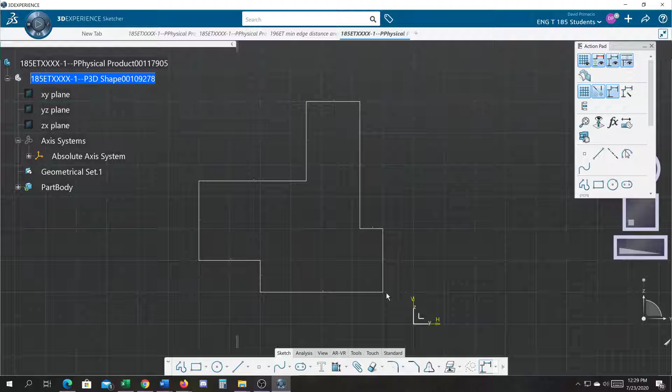Okay, I'm going to hit escape, undo this, get out of here.

Figure 2-4 is the block with the hole in it. You're going to do that on the XY plane. So this one is the XY plane. You're going to hit the sketch.

And for some reason, horizontal in France apparently is up and down, and vertical is side to side. But we're in America. Since we're in America, horizontal is going to go side to side, and vertical is going to go up and down.

In order to do that, you have to find that normal to view icon. I'm going to hit the normal to view once, and it puts the H horizontal and the V vertical, but for some reason it's in the negative direction for H. So I'm going to reverse that again by hitting normal to view.

Slide this down here out of the way. You're going to create your rectangle, and then you're going to create a circle right in the middle of that.

You're going to go create a solid in the negative Z direction, and your starting point again for this one is at 1 and 1. So this corner here is positioned from the absolute axis 1 inch in the horizontal, the X direction, 1 inch in the vertical direction. That is your start point for your rectangle.

Again, you have to measure the size and shape using your measuring instruments found in your syllabus. All right, you're going to create a solid of both of those. So for example, I'll create my solid here.

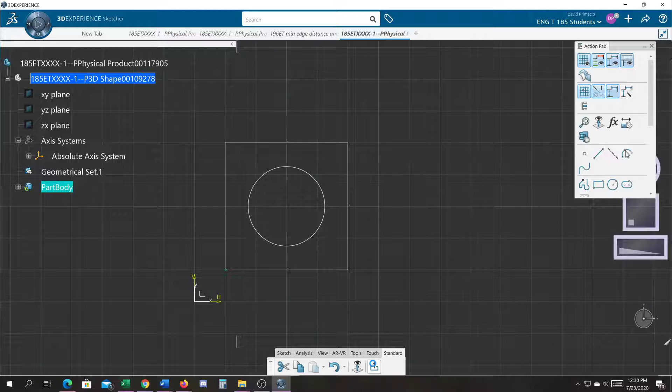You're going to constrain it like you were taught, and then we're going to exit out of the sketcher, and we will build the pad. We'll do this in the reverse direction. Select OK, so the top is on the top instead of on the bottom.

So this flat surface here would be a datum on the same plane as this here.

I'm trying to remember what else I wanted you to do. Basically, you're going to build that solid, with whatever dimensions are given in the book that you'll have to measure from the views. For further clarification on those views, those are orthographic views on figure 2-3 and 2-4. You can do a snapshot, read unit 5 in the print reading book for more definition on orthographic views.

All right, when you're done, I want you to apply aluminum material, and then, well, let's just run through here as a review.

We'll apply material, and the material I want you to use is 6061. We're going to use that for aluminum. Make sure to grab the one with the core. You're going to apply that.

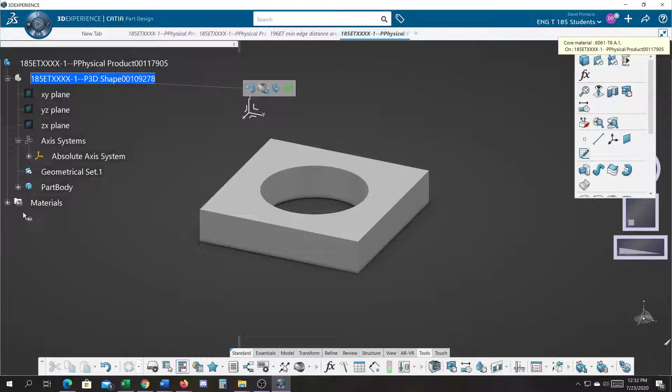And then you got rid of this box, and we're going to pick on the top collector here. Material shows up in the list. Once I'm sure that's the correct one, you can hit the green check to close that command.

The material is added. You will select then inertia. Make sure you grab the part body to find everything in the part body to get the true volume and mass and your center of gravity.

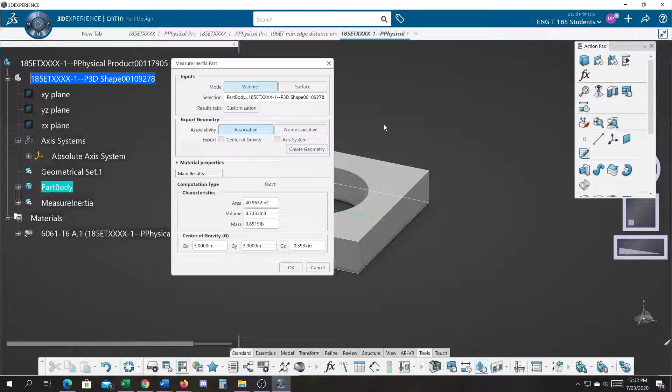I want you to get this and this in the picture. Make a snapshot just like that so that I can see the part, your center of gravity, and your tree. Whoops, I forgot to expand the tree. I want to see what you did in the tree. I should see one pad and one sketch.

Okay, so build the two parts per the measurements in the book and create your solids, apply your material, expand your tree, apply the inertia. I'll see inertia in the tree here as well.

There's your inertia. That would be this here. Make sure you have area, volume, mass, and center of gravity. Take a snapshot of that, submit it to your Canvas assignments. And that's it.